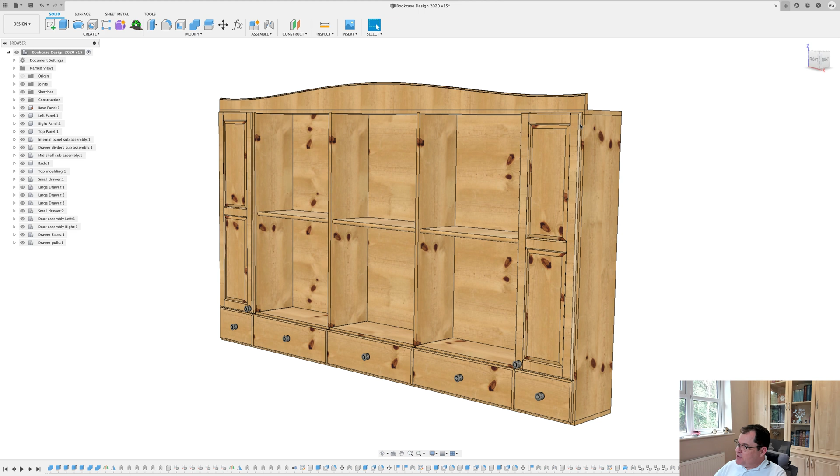So here we are, here's our design where we left it. The only change I've made is I've put a small chamfer on the outside of the doors, the same way I did on the drawer. It was a chamfer command on all the outside edges, and I did it to the joinery thickness, a third of our stock.

So our bookcase is looking really good now. What I want to do is create a photorealistic rendering of our unit. This is one of the great features of Fusion, it's built in. It was one of the features that first attracted me to working on Fusion in the first place, because I wanted to be able to create something that looked good that I could share with our customers.

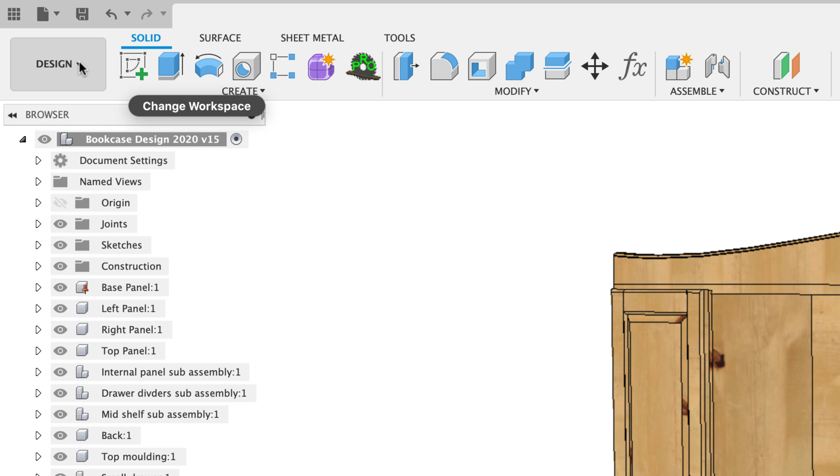Come up to the top left hand corner where it says design, and we're going to change the workspace. Click on the down arrow, we looked at these in episode 1, and the one we want to talk about is rendering. The render workspace generates realistic renderings of the design. Click on that and it brings up a new window for us.

On the left hand side you've still got all the various components, and I can still turn those on and off using the eyes. So if you wanted to select individual components to render, be my guest. You've got a very simplified menu at the top: setup, in canvas render, and render, and we'll look at those in a second.

You can see at the bottom my timeline has gone, but I do have this rendering gallery. As I start to create pictures, an archive of them will appear down here. So if you wanted to do a rendering of just a base panel, that would appear here, then the top panel, and that would also appear in the gallery. You could break it down that way. Not something I've ever wanted to do, but hey, that's cool.

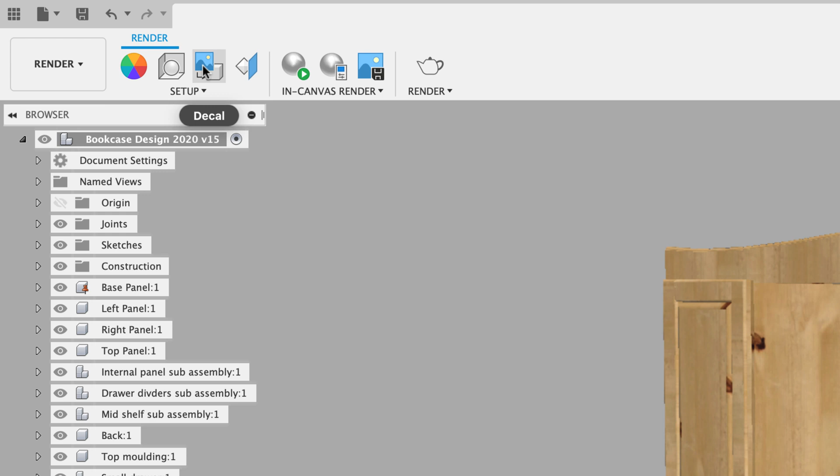So let's look at it. The first thing you want to do is set up your model. The first command is appearance. You've then got the scene settings, the decal, where we can put different graphics onto our design such as the Woodgrafter logo, and then you've got texture map controls.

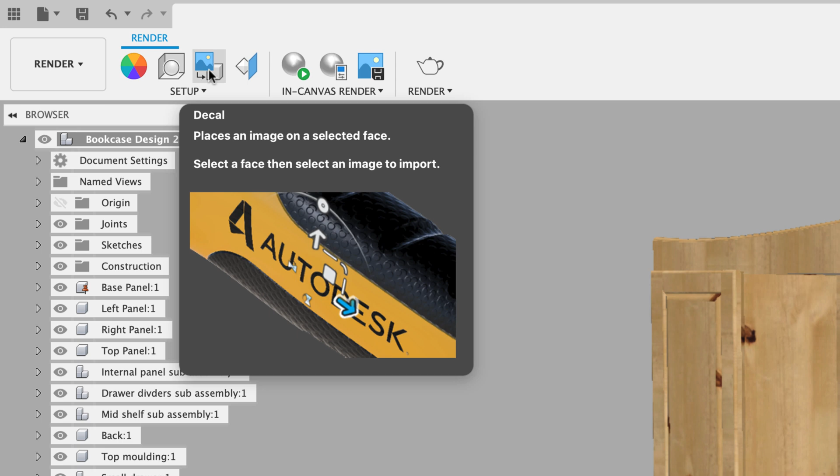The order I tend to go in is first I complete the appearance, then the texture map controls, then the scene rendering, and very often I don't bother putting a texture on it. If you extend the menu, the only additional option is physical material. The appearance and the physical material do exactly the same thing with the same menu we looked at when we designed this, but let's have a look at it anyway.

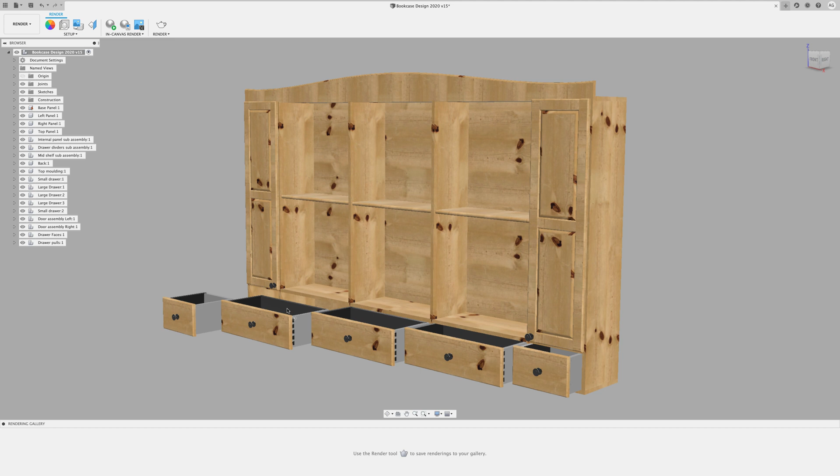If I pull out my drawers, notice the insides are actually still grey. We haven't given those any sort of material. So I can come into my appearance menu, select that, and we get exactly the same menu we've seen previously, so I can simply say what do I want these to be.

Well, we're working on pine, and that's already in my short menu. So let's bring that down and say I want my small drawer to be pine. Straight away you can see it's selected all the material on my small drawer. I want my large drawer to be pine, my next large drawer to be pine, my next large drawer to be pine, and my final small drawer to be pine.

So the first thing you can do is create the appearance on these components. Excellent stuff. Have we got that done? Close it down.

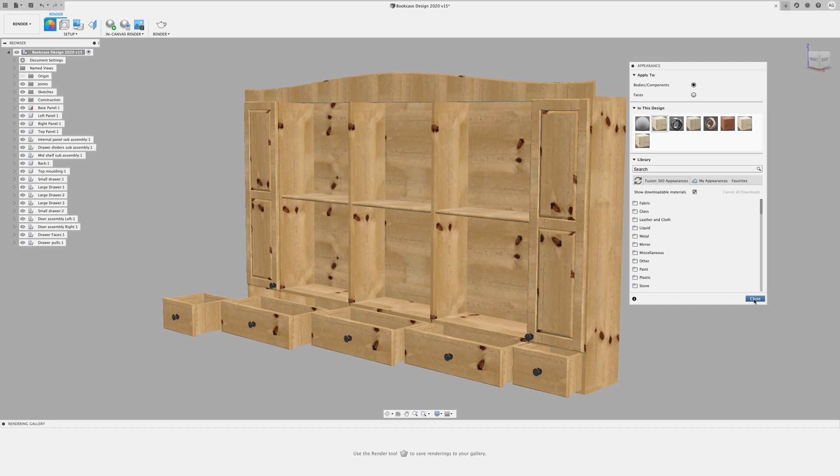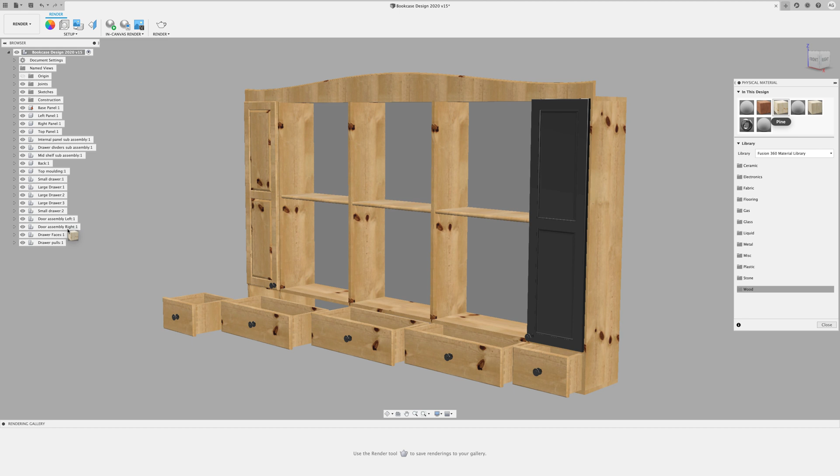Now I don't tend to use physical material here, but if you wanted to, you can see I've still got a number of panels that still think they're steel. So I can come along and say actually all my material is pine, and change my physical material. Small drawer, I want that to be pine. Large drawer, I want that to be pine, and you can see it picks up and copies the information across because they were pretty much duplicates of each other. I want my door assembly to be pine, my other door assembly to be pine, and let's create the back to be pine as well.

So everything's now got the right physical material. Now the physical material isn't actually important to rendering. What's important to rendering is the appearance, but that menu is there if you should want to update it.

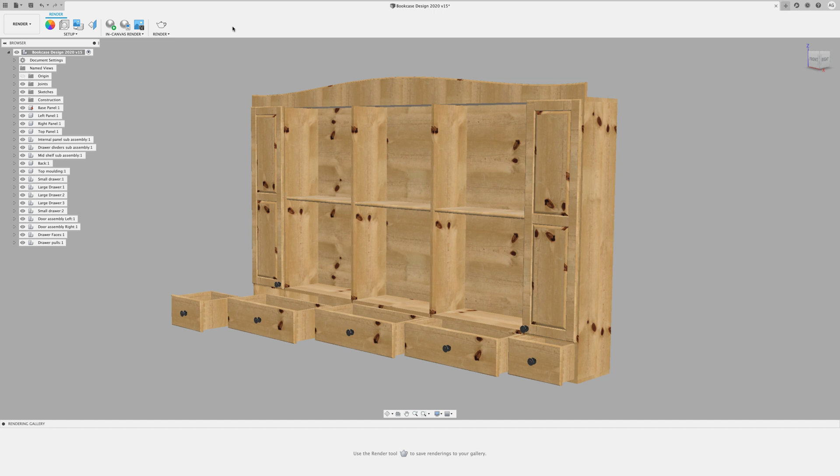Close that down. Notice here we don't have a command that says revert everything to original. If you go back into the design, you can see my position command has now appeared here in design, and it's just remembered what I've done in the rendering. So these two things are linked together. It's put all the pine information on there, and it's pulled all those drawers out.

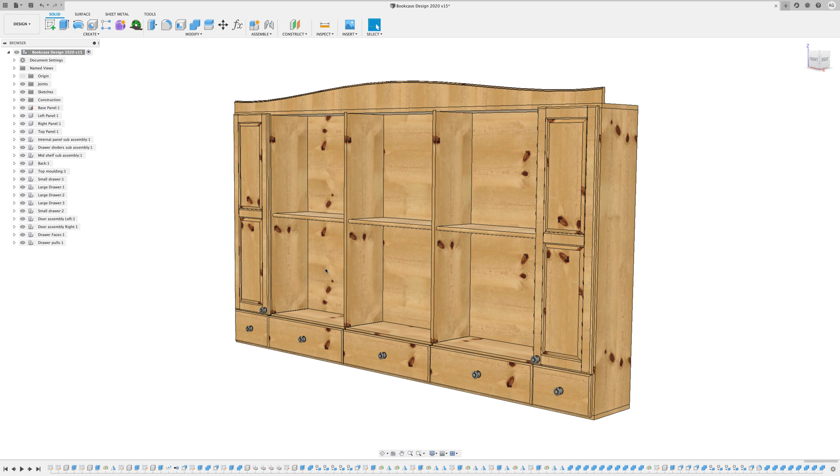I want to put those back in, so position, revert, and that will close all my drawers, but it will still remember the material we've created. Back into our render command, and again you can see that's linked and that's updated.

Now let's pull out one of these drawers and let's have a look at something. Let's zoom in. As it's created the appearance, although it's clever and does use images of pine, it doesn't always get the orientation of the grain right. Look at this side panel here, the orientation is going up and down. That's not something I would want to happen, so I want to change the orientation of that grain.

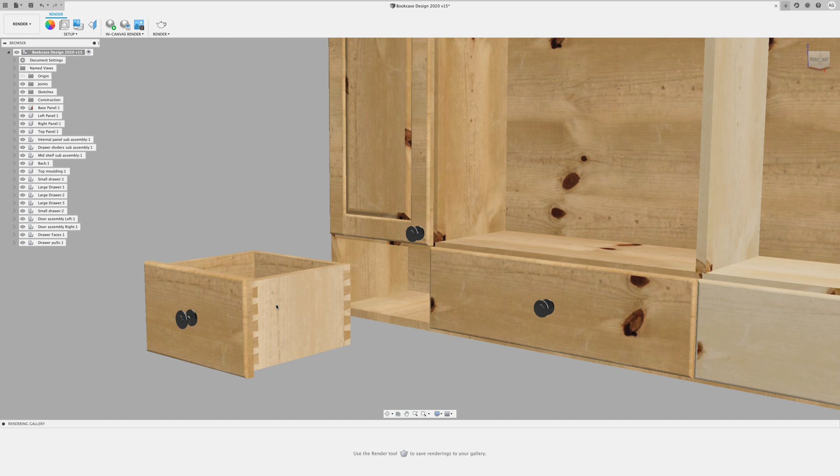That's why the second thing I do in my workflow is this command up here, texture map controls. It sets the orientation of the texture applied to the body or component. Select the object to modify, then the projection type and the axis, and modify the mapping transform using the manipulator or fields in the dialog. Excellent, let's pick on that.

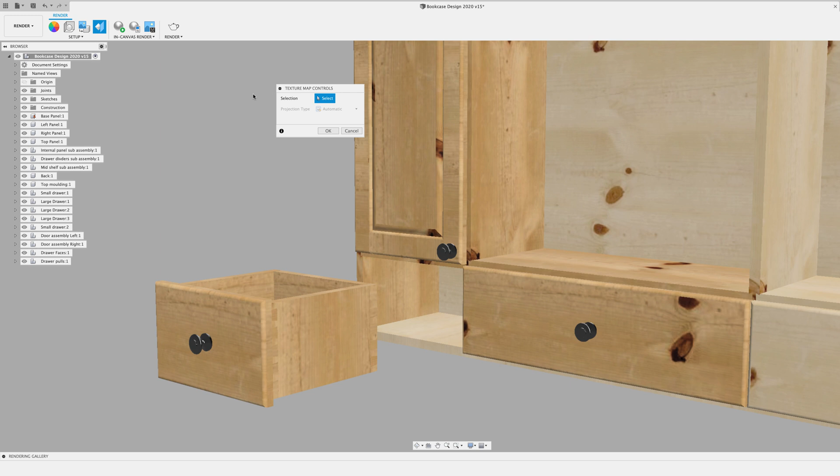Here's your menu, very simple to begin with. What do you want to manipulate? Select that component there, that side panel.

Now what projection do you want? Do you want an automatic one, which is what it starts with and defaults into? Do you want a planar one, creating just one face? Do you want a box one, where it manipulates all of the component as if a box was wrapped around it? Do you want a sphere, or a cylinder? Well, I want to manipulate the entire side panel because that's a piece of timber in our world, not just an independent face.

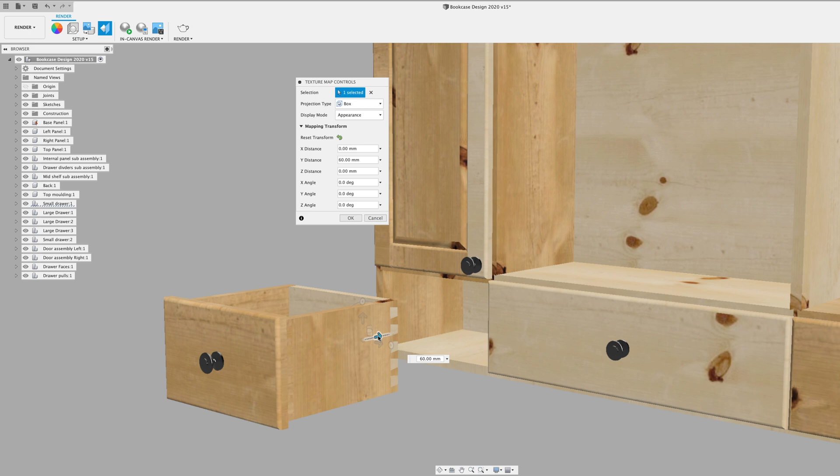Then it says, so what do you want to change? Your x-axis, your y, your z, your angle. I ignore all of that and go down here and play it by ear, or by eye. You'll recognize these arrows: that will move everything up and down as a texture, and you can see that not appearing. That will move everything backwards and forwards as a texture. This one will move it across the grain, and you can see that not appearing on the end grain there.

These two are important to us because they will rotate it. So I can say, actually, I want to grab that and rotate that grain. And you can see that grain rotating. So that grain is now in the right orientation.

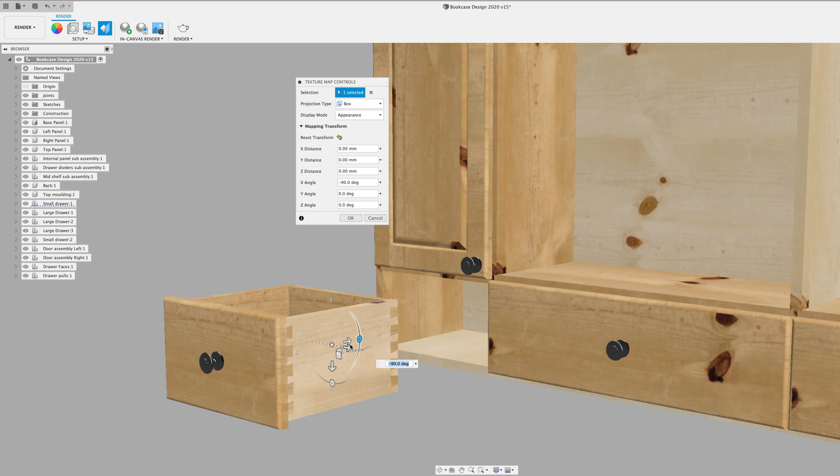Now, the other thing I like to do with this is make things look a little bit different. If you look at these drawer fronts, everything here looks the same, it's got all the knots in the same place, and unless you were doing bookmatching through a log, it's unlikely that would be the case. So I want to change that.

So we go back into the texture map control. Let's select that front panel, let's do box again. First, let's put the grain in the right place - it's remembered we changed the grain, so it's done that for us. Now let's just drag that up a bit, and let's do something totally different and have, I don't know, that. That looks different, doesn't it?

Now you don't need to come out of this. I can just click on the next piece, and I want to change this one. I want to go into box, and let's drag this one, let's reorientate the grain again.

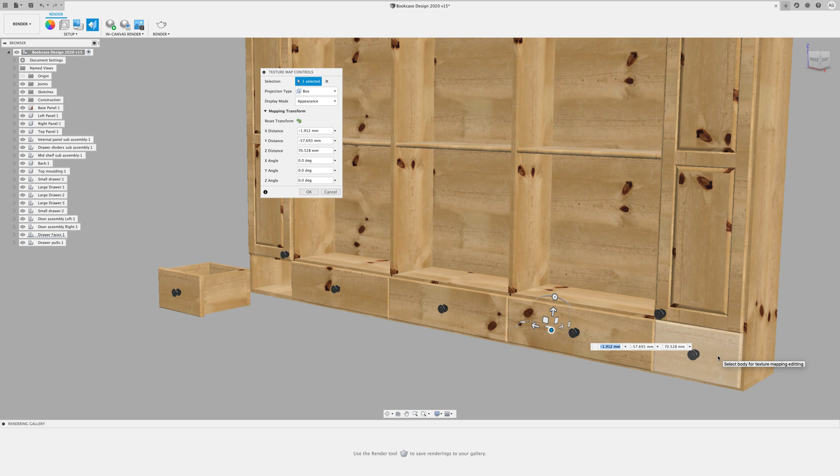Let's make that something like that. Now let's go into this one, again we're going to go into box. Let's orientate the grain how we want it. In fact, let's flip that down completely. Let's go in this direction on this one, and let's put that over there. That's a nice contrast, and that end one is okay. Perfect. So we've now changed the grain bit on those front drawers, and straight away that looks a lot better.

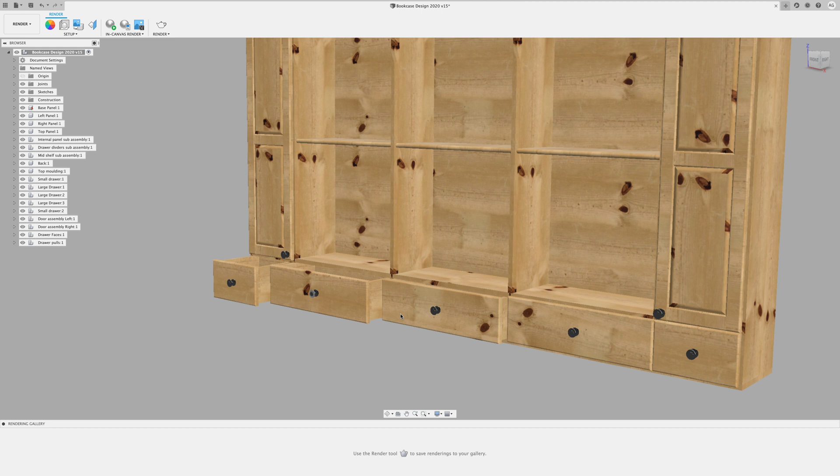We've changed the texture on this drawer here. That one looks okay to me. That one looks okay, I'm just going to have the drawers like that. So 3 of the drawers are going to be slightly open for our picture, so I can manipulate and drag that around.

Looking at these two doors, they're a bit samey for me, so let's change these. Back into our texture map controller, let's work on that panel first of all. Let's do a box again, and let's just move that so it looks something like that. Let's pick on this one, let's move it so it looks something like that, so it's a bit different, but try and get a bit of a grain match going on. That looks nice. Let's have a look at this one here.

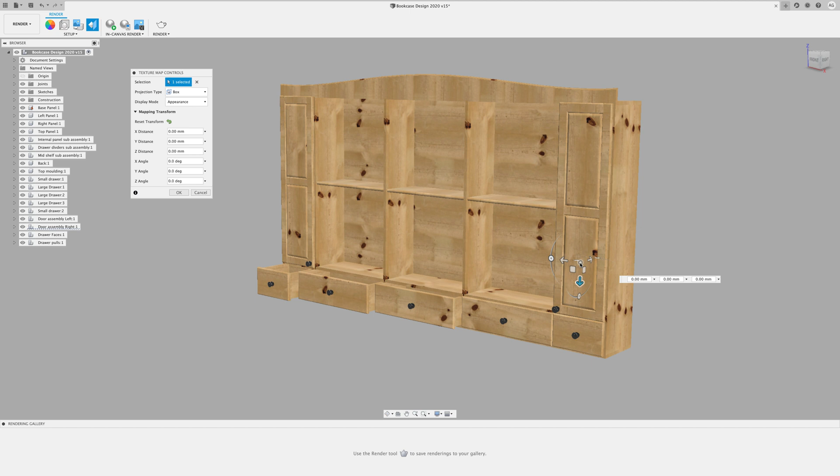Back into box again, I think we'll do something like that, and then let's do this bottom panel here. Back into box again, and let's just try and match the grain up and do something like that. Okay, so it's simply a matter of playing around with your grain surface using this texture map controller till you start to get something that looks authentic.

Now have a look at these middle panels here, these middle shelves. The grain is running front to back, that's not very good, so let's change that. Back into my plane, let's select that shelf there. Let's go to box again, and let's just grab that little handle at the back and just spin the grain 180 degrees. That will look good.

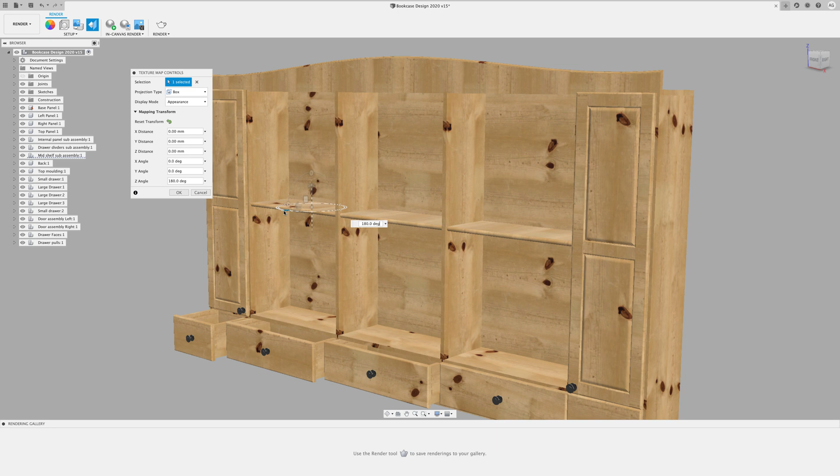He says, having done it wrong. That's better, that's better. We'll spin this one as well, just turn that around so it looks good.

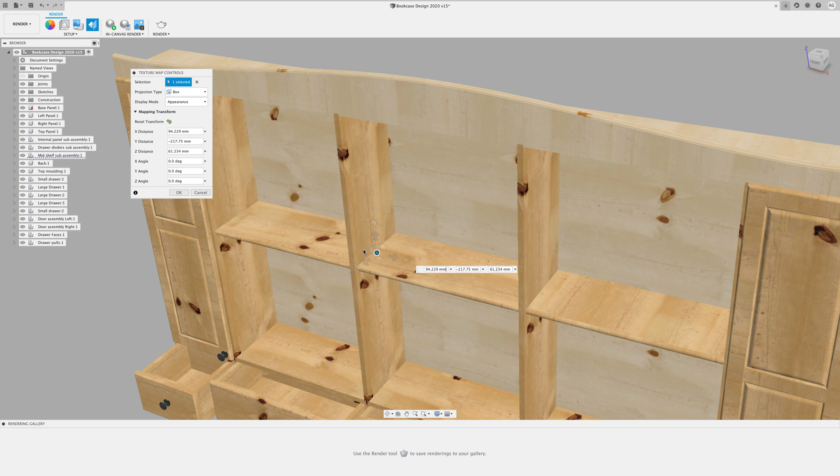Let's just change these knots so they're not the same. Let's just get those out, something like that, I think. And then let's come along and change this one as well. Back into the box, spin the grain around first of all, and now let's do something like - oh, I don't want to push it out completely, pick up a totally different pattern of wood. Think of something like that.

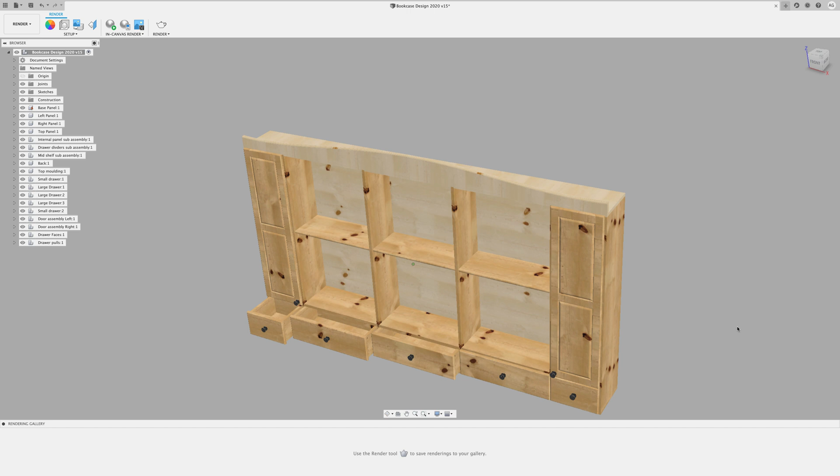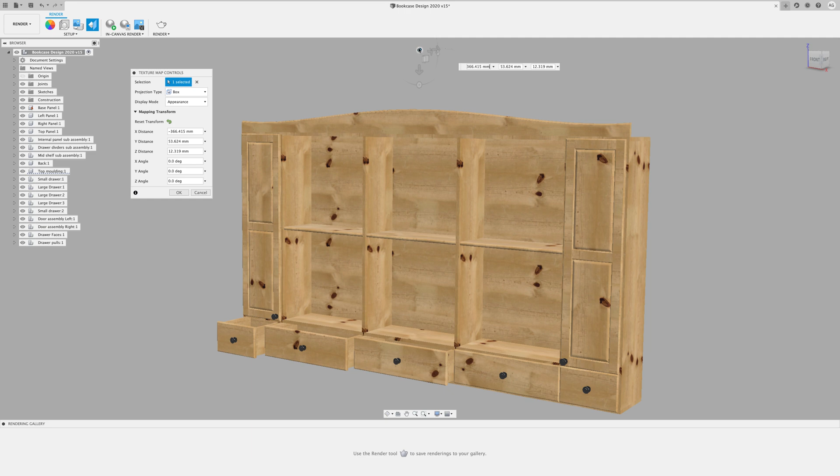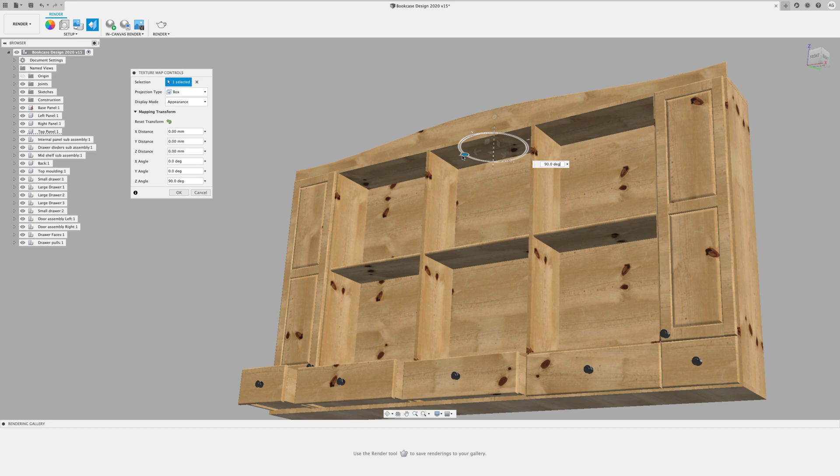This top one I don't like, so let's change the direction on that top section. Again, we'll go to box and we'll just simply spin that grain, I think. Something like that, maybe a few less knots, something like that would look good. Just noticed here, this is just showing through - the grain pattern on this top panel is in the wrong direction, so you can see it's got end grain there. So let's go ahead and change that as well. Let's go for box, and let's just change that grain pattern, something like that. It looks different, looks good to me. Yep, okay.

Now once I've got that, I want to pose this, because what you see on the screen is what it's going to render. So if you have your object in the distance, it will render it in the distance. So come up and get it sort of in a reasonable position. We can change that in a second, but something like that I think is going to be a reasonable distance. So play around with the grain, and play around as much as you want to get the look and feel that's right for you, but I'm not unhappy with that.

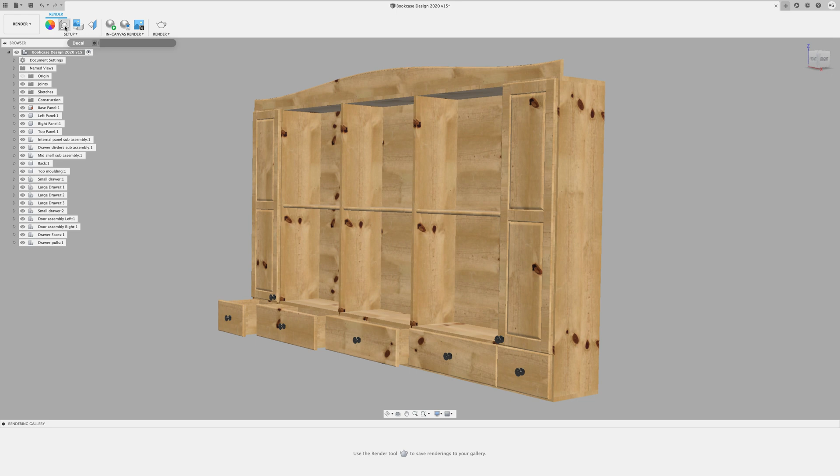Then you want to come into the next thing, which is now going to be the scene settings. Set the environment and lighting for the scene. This section only affects the rendering workspace, so if we change everything here, you're not going to see the background in design or any other workspace change. So let's check that menu. Now this menu looks quite complicated, but this is really affecting the background and the lighting and the ground plane.

Environment first of all is brightness, and you can simply scale that up to change the brightness of your object. You want to set your lighting to something that looks good - probably about where it was, 1091, is good.

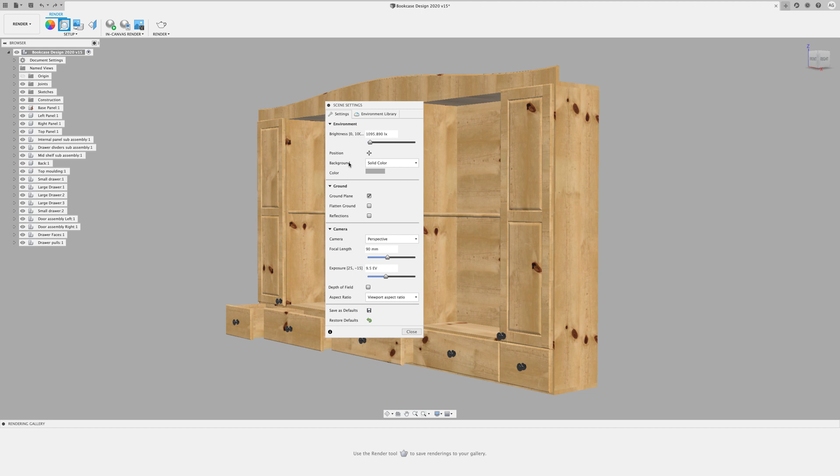Now the background - you can have a solid colour, and you can pick solid colours. If you wanted a real contrast, you can make everything black, and that really makes your bookcase stand out. That might be something you want to do. You might be into very white backgrounds, or maybe you like red backgrounds. Choice is yours, and you can play around with the solid background. Very rare I use solid backgrounds though.

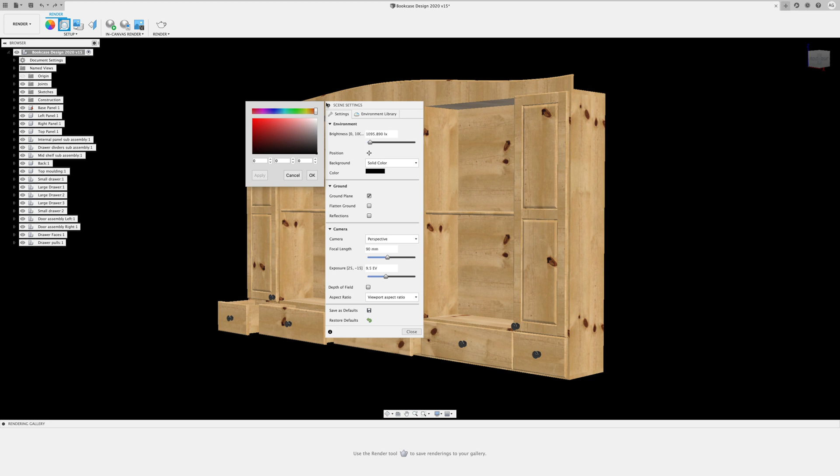What I tend to use in the background is not a solid colour, but an environment. We'll look at environments in a second on the Environment Library.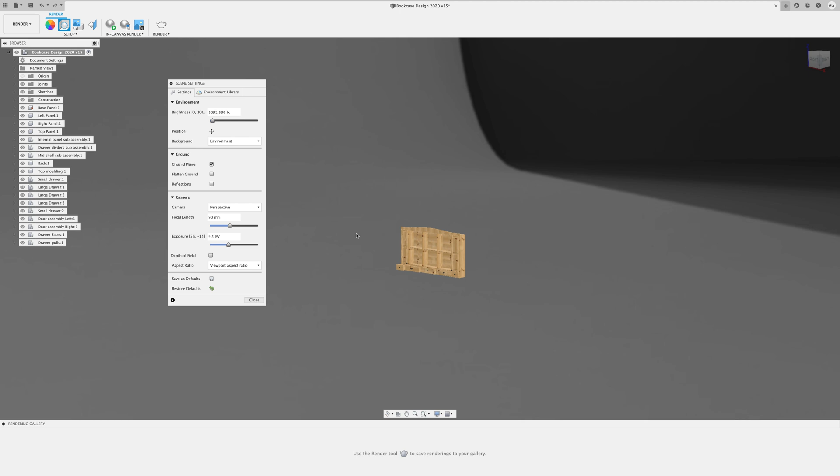Now the next thing is, do I want a ground plane? If I zoom right out, you can almost see on this background this sweeping line, which suggests this is like a grey piece of bent card, with this being the upper wall and this being the ground. That's what it's talking about. Do you want a ground plane inside there? Yes, we do - we'll come back to that. It's more obvious once we set up the scene, but I can flatten the ground, have reflections inside the ground, change the roughness of the ground plane, etc. We'll look at that shortly.

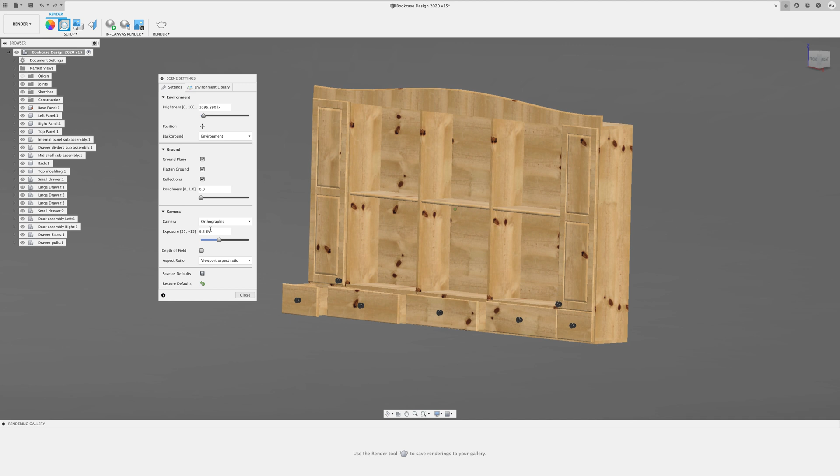Now, camera - what camera do you want? Do you want perspective? Do you want orthographic? Do you want perspective with ortho faces? That's exactly what it says on the tin. Orthographic I always hate when I'm doing 3D designs - yes, it's probably realistic, but it looks stupid. I like perspective. That's what I always tend to use.

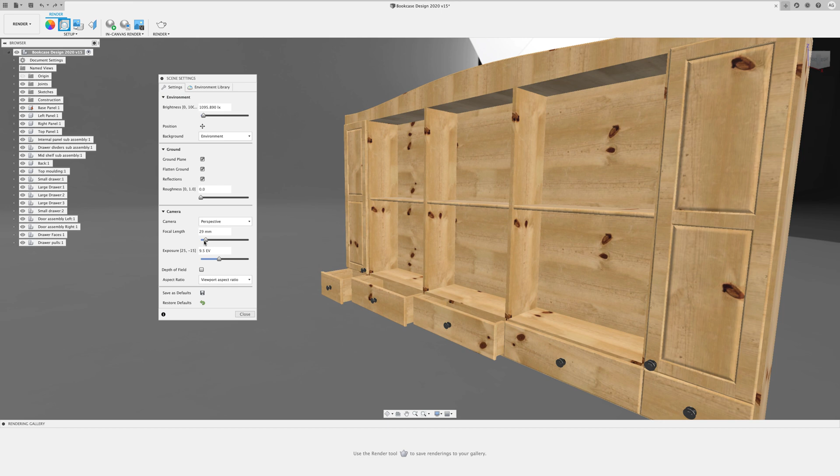The choice is yours, but you can change the camera view. Focal length changes the type of camera you want, so you can have a different focal length - just think of that as a camera lens. You can have a very wide fisheye type lens, all the way through to a zoom lens that tends to flatten things out. I find that the standard 90mm lens is pretty good - it gives us what we want it to do.

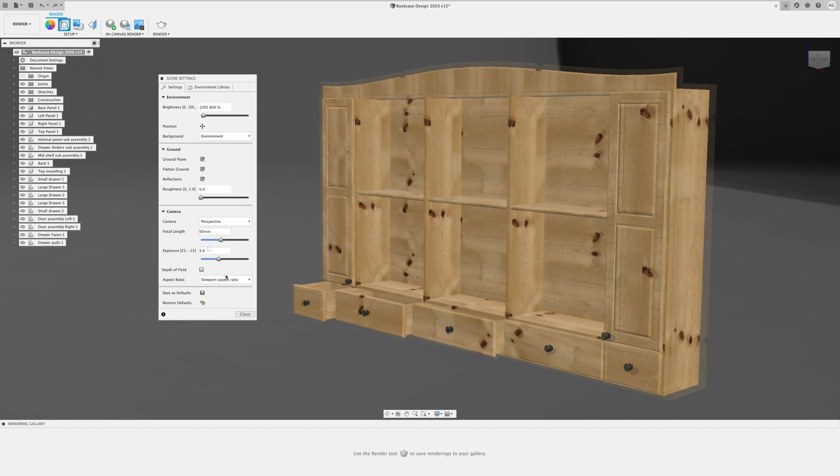Now your depth of field is exactly that - a depth of field. If you've got ray tracing enabled and you're doing your rendering, depth of field kicks in. Depth of field shows you where your focus is going to be, and you see I've got this little green dot here - see that? What you do is click your center of focus arrow and say where do I want my depth of field, and you can see where I click - it's putting in that little green blob. That's where the camera is going to focus.

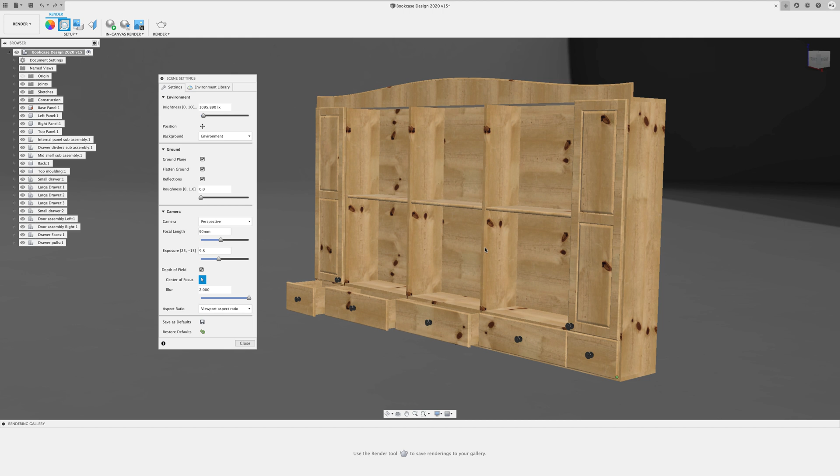So I came right down to this bottom right hand corner - that's where my camera would focus, and the blur aspect is what's going to be in focus. I've got two at the moment - it doesn't really show up on this, but when you render it, if I had my blur all the way through, the unit would cut off very quickly and blur out. If you've ever seen portrait photography where the face is very clear and the background is blurred, that's what it's talking about. I don't tend to use that per se because I want all of my cupboard to be in focus, so I don't tend to use depth of field, but that's what it would do.

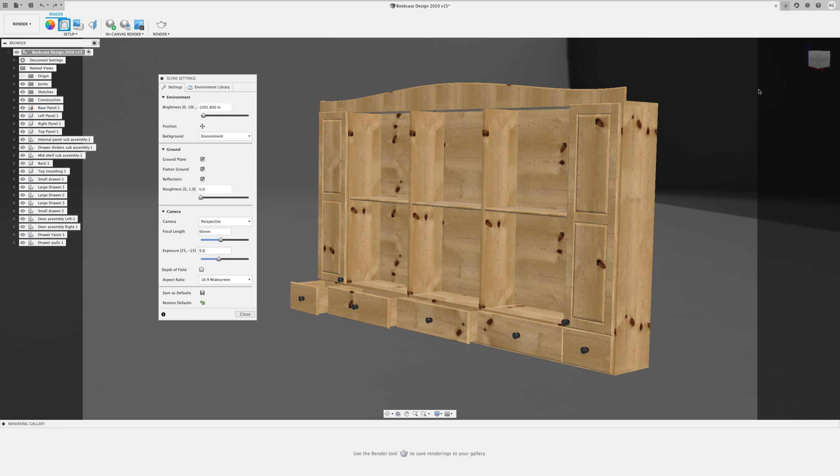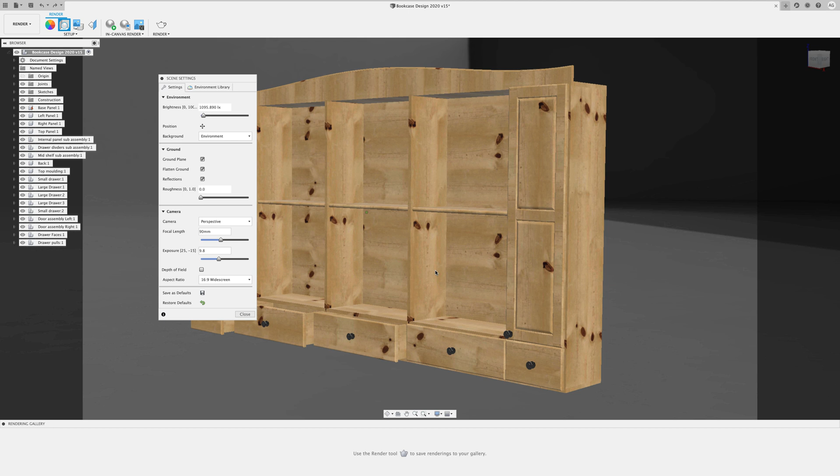Aspect ratio is pretty important to us, so what do you want? I tend to display these on widescreens, so I tend to go to a 16:9 ratio here, and you can start to see it's put these side borders in, and that's now showing what's going to be rendered - anything inside that square is what's going to be rendered. If I brought it down to a 1:1 square, you can see it's very small, and if my cupboard was here, all this cupboard on the right hand side would be cut off. Landscape, portrait, custom aspect - I go to widescreen, and then I make sure that I pose my cupboard in the middle of the widescreen, something like that.

So I'm beginning to see how my cupboard's going to look. Once that's done, you can save those as defaults, which I don't tend to do because I tune each and every project. Now let's go to the environment library.

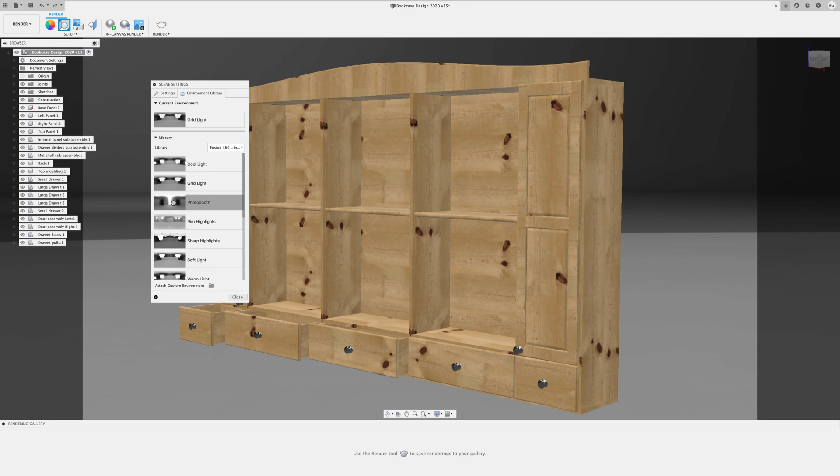This is the background you can see, currently selected as sharp highlights. Inside here you've got cool lights. If I click change the background, so grid lights, photo booth, you can see it's changed the background there. Now I tend to like photo booth. It gives me a nice feature as well, and we'll come back to that in a second.

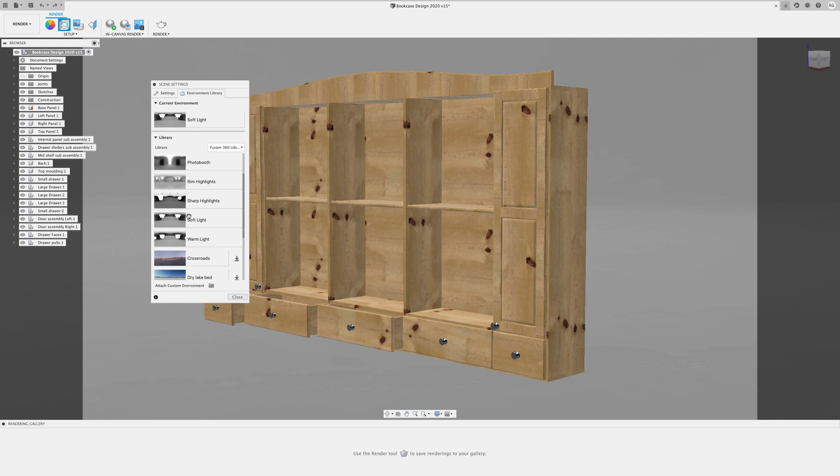Rim highlights, that's as if you've got spotlights shining on it. Sharp highlights is the default one. Soft light, and what these are doing is actually setting the background, and it's putting the light conditions on this as well, just as if you were in a photography studio.

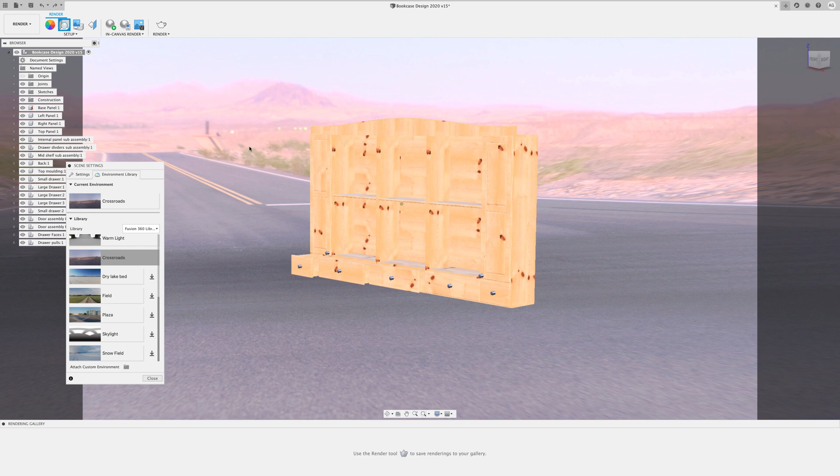Now you can do other things as well. Let's download Crossroads for some random reason. Double click Crossroads, and now you can see that's put it in the middle of a roadway, basically on a crossroad. You can actually import environments, but there's a certain file format to use, and I've never really played with that. In theory, I could take a photograph of a customer's environment and drop this in and say, hey, if you want to put your bookcase in the middle of a main road, that's what it would look like.

As I say, I tend to use photo booth, just experience shows me that's better. Once I've selected my environment, come back into the settings, and there's this position underneath the environment, and highlight on that, and it gives me some scales here. So I can actually rotate the background now independently of my unit.

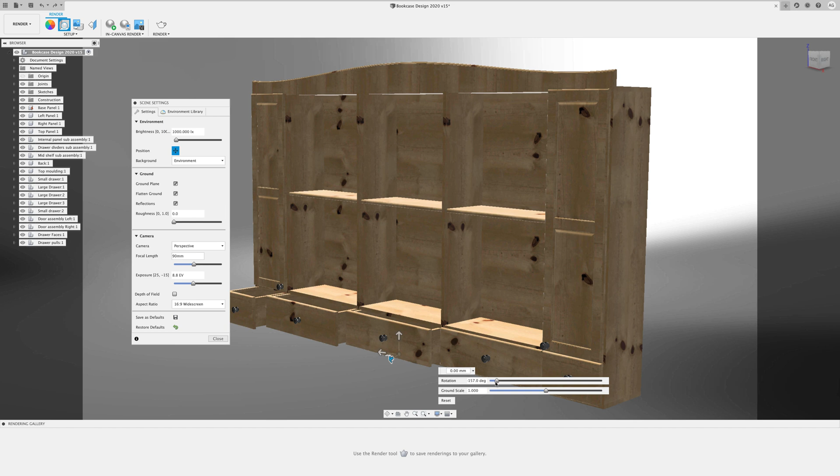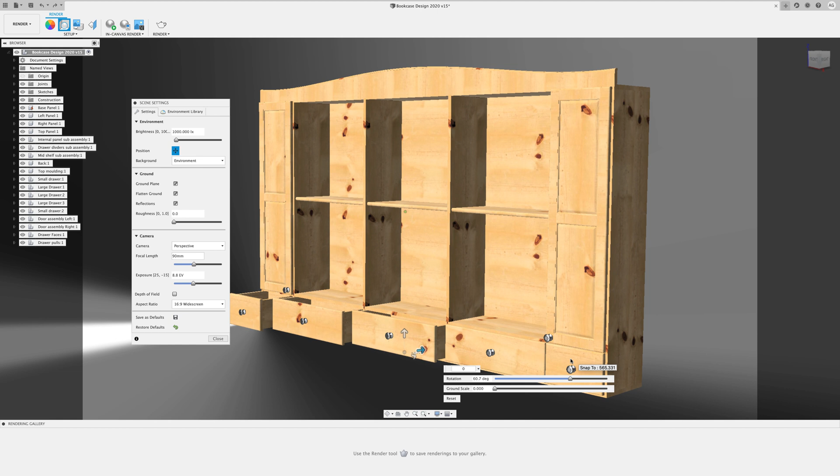So I can spin this round and put the highlights where I want, and I quite like to get a sort of blackish background, almost like that, and then change the ground scale a little bit. I just rotate this now until I get something that I think looks nice. And I like that because it showed me some interesting shadows. Just going to turn a little bit further. I want to get that ground scale so it's a bit blurred, further from the ground, so we get a bit more contrast.

I like that, that's looking pretty good to me. Now it's a little bit bright, so I'm just going to knock the brightness down a little touch of the overall scene. Let's try 800, bit better. And you see these blue arrows appeared? That now shows me the position of the ground.

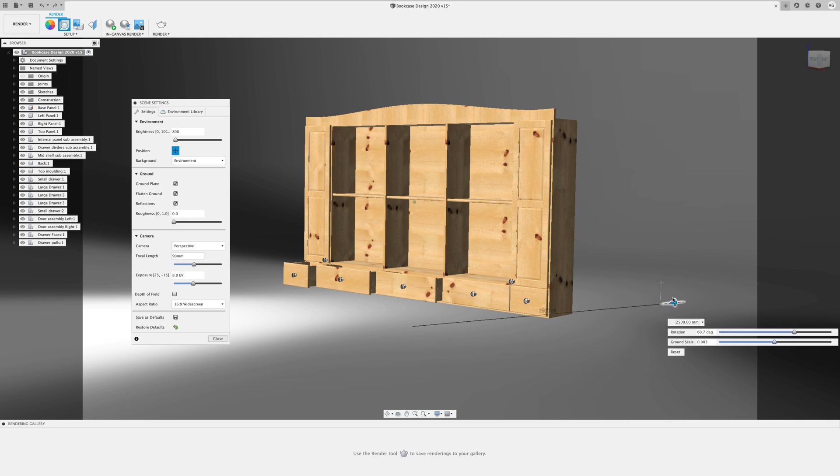So I want to bring the ground down a little bit so it's not cutting anything off, probably about -200. I'm going to flatten those ground textures off, and then I can just move the ground round a little bit to see where I want it to be. Maybe bring that forward. Yeah, that's looking quite good. And now I can just bring that in. Now that starts to give me the shadows and the light, and you can see the light glinting off these areas here. It starts to get a little light here on those dovetails.

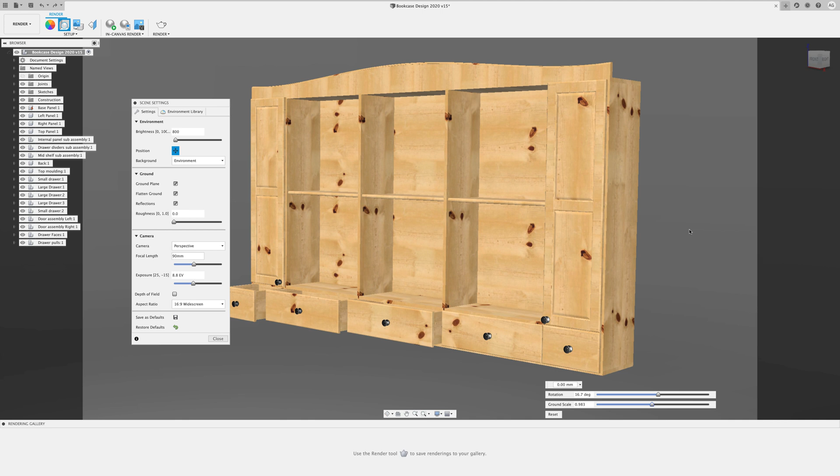Maybe rotate that light around a little bit more. There you go, that's looking good. So you can now set up your lighting studio by playing around with these controls.

So let's walk through that again. First thing I do is I choose the environment. I normally go for photo booth, that's a soft light with a nice greyish background. You can then change the brightness of this so it doesn't look too bright. So let's just drop that down a little bit, maybe 790, maybe 780. Yeah, that's not too bad.

And then I can change the position of this. I can move the ground round in relationship to my drawing by grabbing the blue arrows, and I can rotate the background and the lights so they pick up the right accent for me, maybe that. And I can change the scale of the ground by zooming in and out, which just gives you the ability to change the look and feel of that.

I can then choose whether I want a ground plane at all, so that will flatten it out. I can flatten the ground so the textures are flattened. I can put reflections on and off. I can change the perspective of the camera, the focal length of my camera, the exposure of my camera. In fact, I might just knock that exposure down a little bit. What was it, 8.8? 8.9?

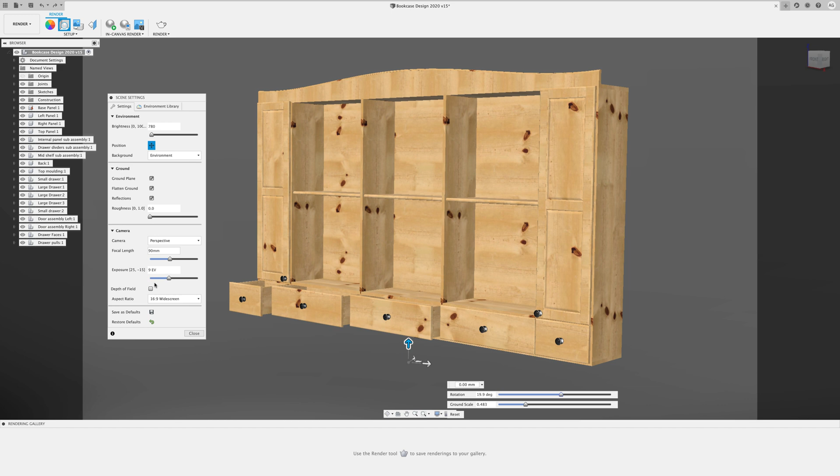Okay, so I'm going to change that to 9, and I want it in widescreen. Close that down. Okay, so now you can see I've got my photo studio set up.

I've changed my grain orientation, messed things around so it doesn't all look the same. I've posed my drawers and the position, changed the environment in the background and spun it around so my lights are good. Now the final thing, I'm staging that within the frame, that light grey background we've got there. And now I'm ready to... oh look, that top panel's changed. I'm going to come back in and change that top panel, don't like that box. For some reason the grain's changed orientation. I don't know how that happened.

Okay, better. Right, I'm good to go. Next thing I want to do is render it.

So let's look at the in-canvas rendering first of all. In-canvas means it's going to render it on this screen as is, as opposed to render that's going to create you a downloadable picture of it.

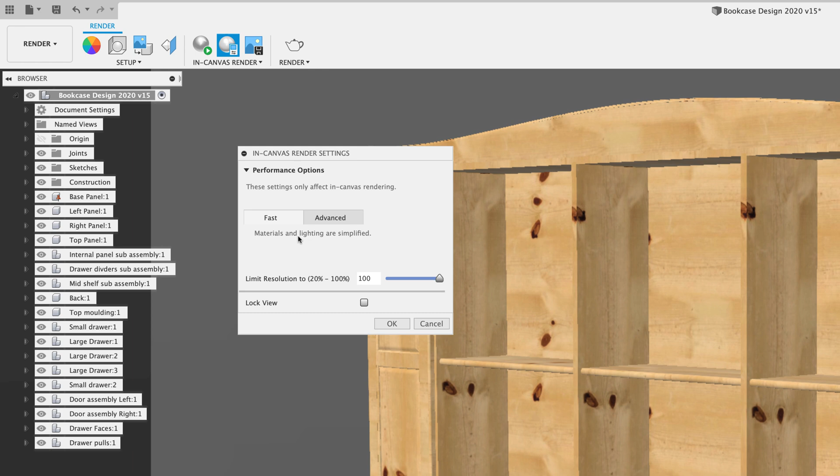To start, you just click the in-canvas rendering start button here, but let's look at the settings first. You've got a fast setting, where materials and lighting are simplified, and advanced, where they are not simplified. So advanced is going to give you a higher quality, fast is going to simplify your lights and give you a lower quality but faster render.

Now fast is good because I only want to see what it looks like. This is not my final render, it's an indication. So I'm going to bring the resolution down to somewhere about 50. I'm going to lock the view so when I move the control nothing changes. Click OK. Now I can start my rendering by clicking in-canvas render.

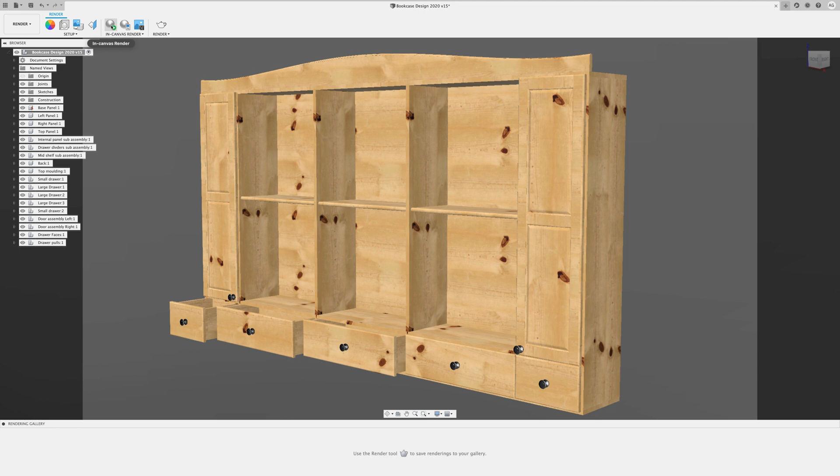Now you can see it's slowly starting to build up that picture. You can see the reflection coming in on the floor from that reflection setting we created. And you can see the elapsed time down in this corner as it builds that up. The longer you leave it, the better that rendering is going to be.

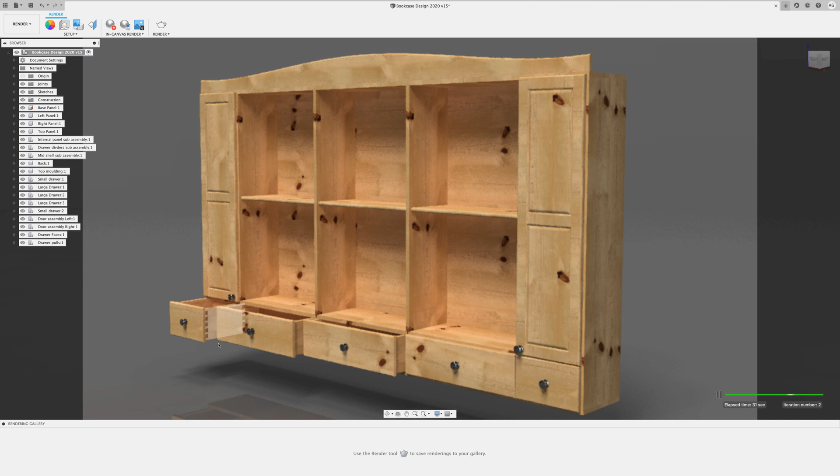Now straight away I can say I don't like the reflections here. I want these reflections to be a bit closer. So I want to change the position of my cupboard in relationship to that ground plane. Let's pause that render and go back to our scene setup.

I want to click on the position, and I just want to bring up that floor to that. It's trying to keep up with me on the rendering here, which is quite useful. So I'm slowly bringing that up and saying, actually, do I want that to be 0? So it's actually resting on the floor. Let's try that.

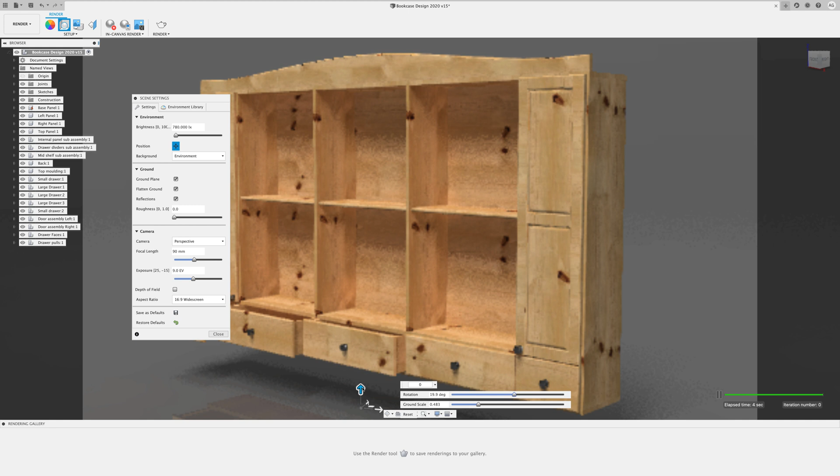No, not really. So let's bring it up to there, I think. That looks quite good, doesn't it? So I've got those reflections now on my shiny floor, and I've got those reflections in the right position. I think I quite like that.

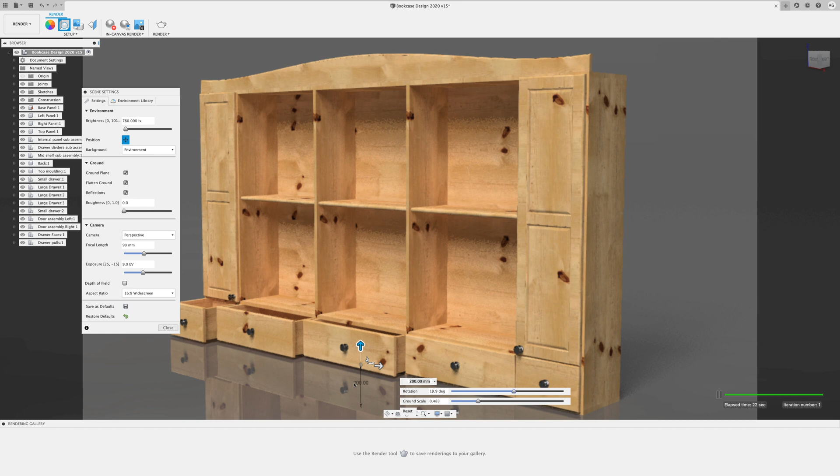And you can see it's still trying to render, it's starting again now. So you can really get a view of what your render is going to look like. And I love these reflections on that shiny floor. I'm happy with that. Okay, so I'm going to close that down. I think that's going to look good, so I'm happy with that render. Let's pause that rendering so it's not messing about on us.

Now let's go to the teapot menu here and click on render. Only one command, render: create a high quality rendered image of your scene using cloud or local background rendering technology. Choose the desired image size, the settings, the cloud or local render, and click render to start the rendering process. Finished renderings will appear in your rendering gallery. That sounds good, let's click on the teapot.

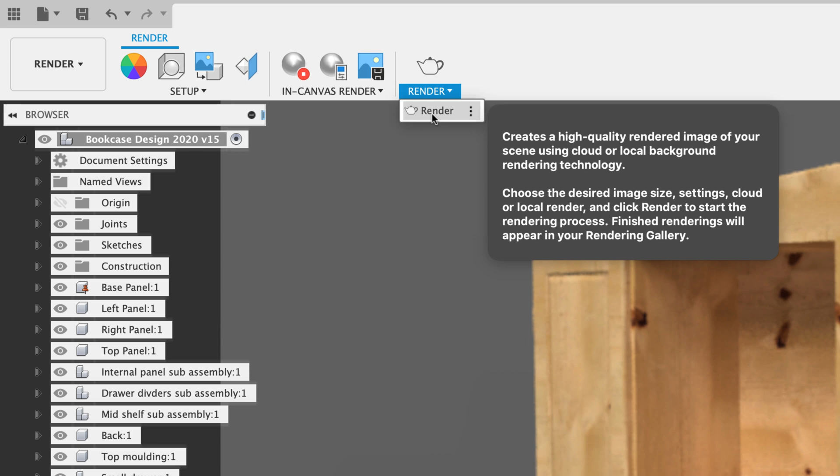Now the menu is pretty simple. A number of defaults across the top: web, mobile, print, video, or a custom option. If you click on this, it's the web, it's 854 by 480. That will set it all up for you.

The only other thing you may want to choose is, do you want it to be a standard quality or a super final quality? And do you want to render in the Fusion Cloud, which costs you credits that you buy, or do you want to render it on your computer, which is somewhat slower but is free?

You then get an advanced setting menu here you can click on, and do you want it final or boost it all the way up to excellent? So you can now have an 854 by 480 rendering on your computer, super high quality, and you can now go and click render.

Do you want to do it for a mobile device? Do you want to do it for a print device? Do you want to do it for a video? Or do you want to do a custom rendering?

Now what I tend to do is actually go for video, and I tend to choose 1080p, because I sometimes use these images in my YouTube production, so I just use that resolution. It just makes it the right size for me, I guess, the right shape. It's pretty big, 2.1 megapixel, but that's okay.

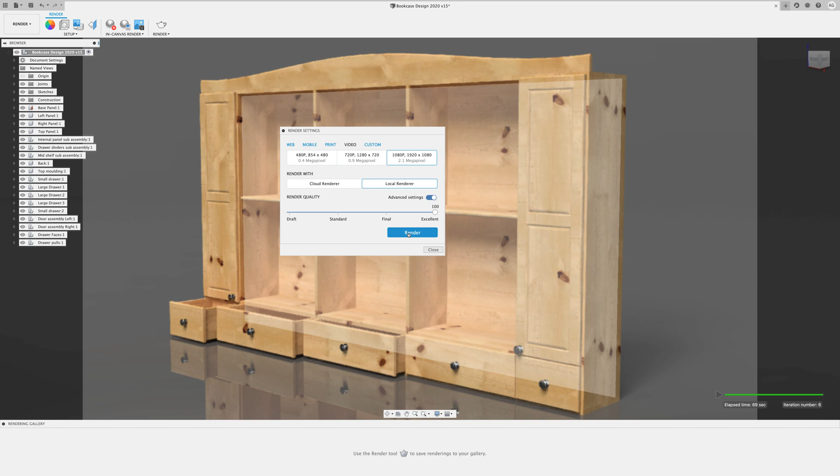I local render it because why wouldn't I? I've got a powerful machine, and I have it on excellent quality. And then you simply click render. I get a flag, local rendering is started.

Once the rendering is complete, click the thumbnail in the rendering gallery to view the full image. So once it's ready, it will appear down here in my rendering gallery. You can see that's now beginning to appear, and I've got a line now of the overall progress, and that's going to take a little bit of time to render.

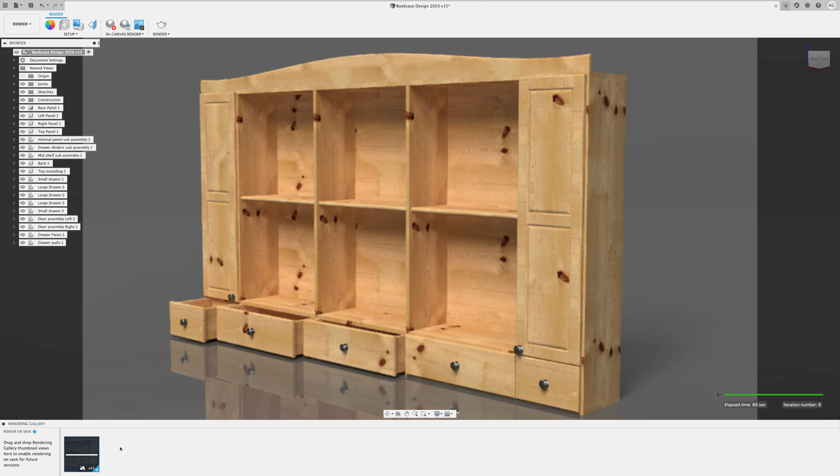So we'll let that cook. I'll make the cup of tea that it promises me as part of the rendering tool, and we'll come back and have a look at that once it's completed.

So there we go, rendering is complete. That took about 45 minutes overall. So come down to the rendering gallery, and now we can just double click on that, and that opens up and gives us a view of the render. And as you can see, pretty nice, photo-realistic, or more or less.

Now what I would say about doing the local render, you do miss out on a couple of features. You can see here, I've got this one known as turntable, and a feature that looks at post-processing. If you were to click on the turntable, if you were to go ahead and render this in the cloud, you'd end up with a 3D image that you could actually rotate, where this is obviously a 2D image, and that can be really quite powerful in some situations.

Post-processing would allow you to do some fine-tuning of your render, but once again, that's not available if you've used local rendering. But for what we're trying to achieve, a photorealistic image of something, I think personally that is good enough. If you don't like it, you can always go ahead and re-render. If you don't like it at all, you can delete.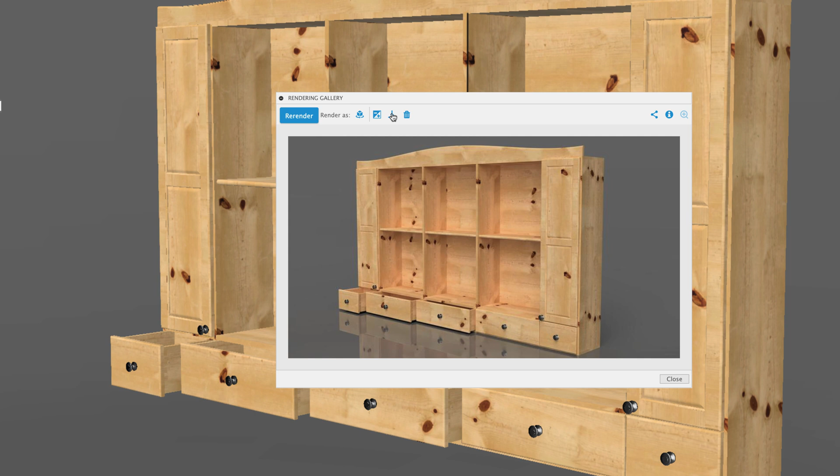But let's download this. Click on the download button. Now that will bring up whatever your system menu is. I'll just put it down to my desktop for now and save that down. And there you go, you now have a high quality 3D rendered image of your project.

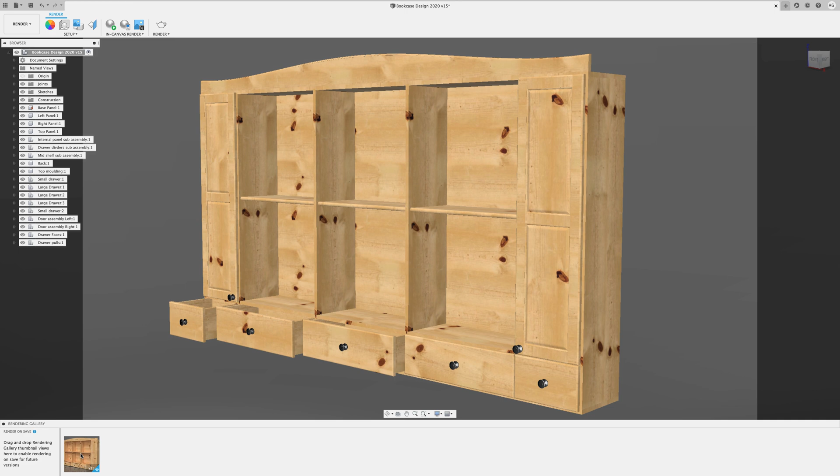And I think that's really powerful. Now this will actually stay down. You can see it's got version 15 against it. And up here, Bookcase Design, I'm actually on version 15.

So if you wanted to change some of these panels, if I was to come into my door assembly left and I was to look at the raised panels here, let's come back into our appearance menu, and I'll download a curly maple... no I won't, something dark.

I'll download a glossy mahogany, and then I'm just going to come in and say I want the raised panels to actually be mahogany. There you go, for some random reason.

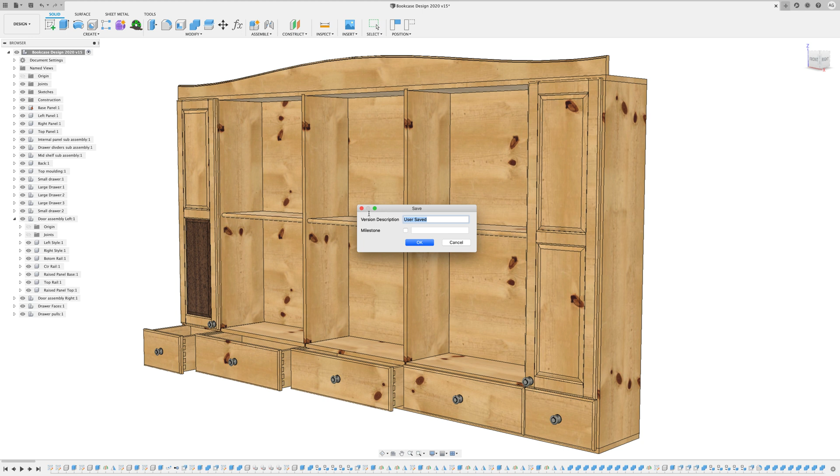Now if I save this down, I'm going to come to the save button, save it as a new version, and let's just call that new panel. Okay, save that down, save to the cloud, and come back into my render pane. You'll see that it's updated here.

So when I now re-render this image, it will give me a second thumbnail down here. It'll take another 45 minutes. But you can see how that could be quite powerful. So I can design once, render it in a material, and then add uplift features. So if you wanted this standard bookcase, it's going to be X amount of money. If you wanted mahogany panel inlays, this is what it would look like, and it'd be X amount of money. So you can design once, render many different ways by showing the appearance, and that will build up a catalogue of thumbnails that you can use.

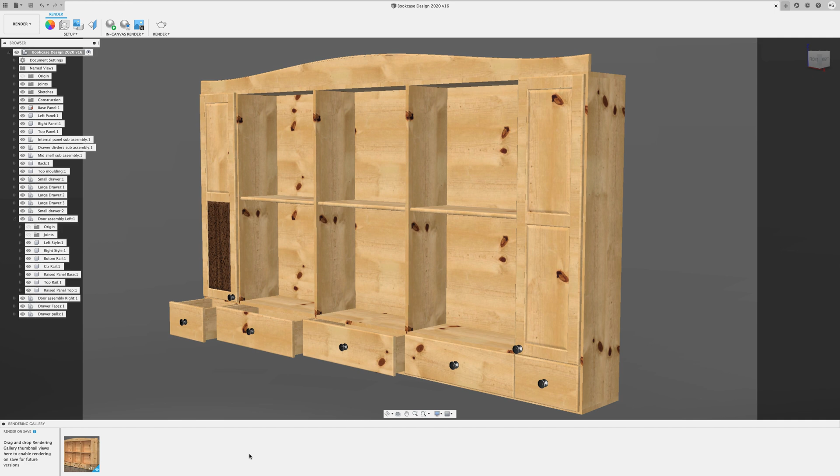So there you go, that's the rendering feature inside Fusion 360. Super powerful and super useful.